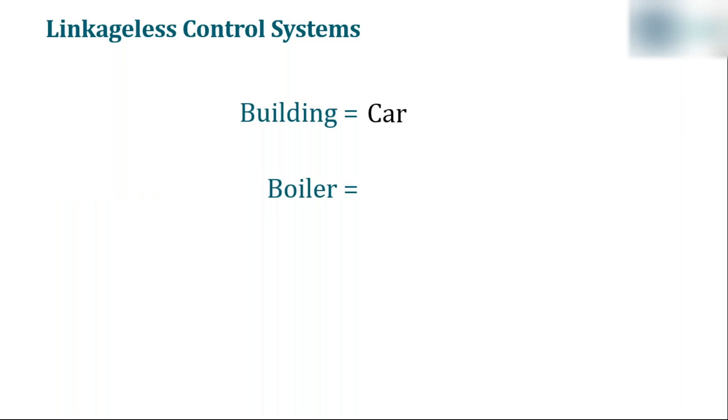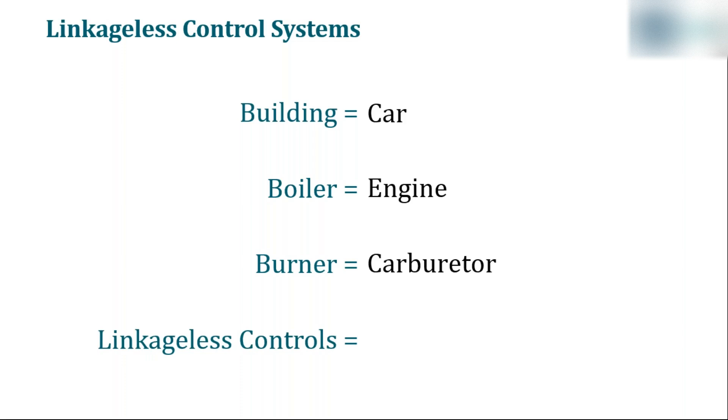But first, why linkageless? I like to use an automobile analogy to explain. In a boiler system, the building or the process is most like the car, the device that uses energy for a purpose. The boiler, which converts energy, is like the engine, while the burner is most like the carburetor, mixing air and fuel. The air-fuel ratio control system, when an old cam and linkage type, is like the float and jets inside a traditional carburetor. Almost no one likes to work on them, and fewer people truly understand how to make them work properly. The air-fuel ratio control system, when linkageless, is like an electronic fuel management system found on most cars since the mid-1980s.

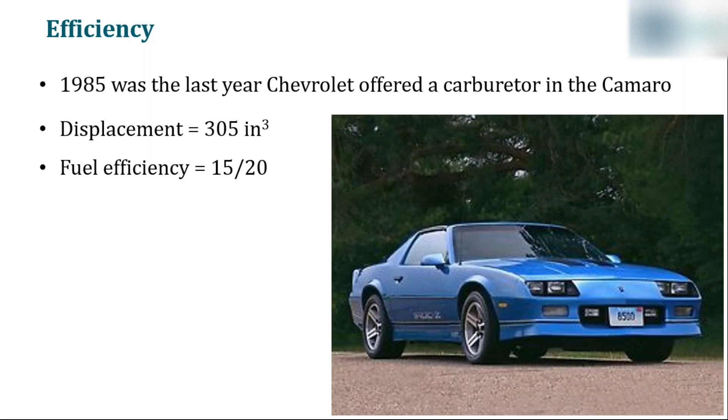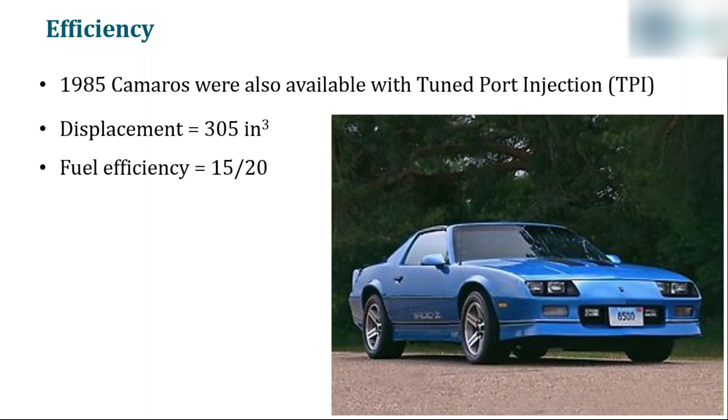Now, the Camaro is a good example because 1985 Camaros were also available with tuned port injection, one of GM's early versions of an electronic fuel management system. That same 305 cubic inch engine with that same fuel efficiency could produce a markedly better 215 horsepower. That's an 18% increase in power by simply improving the air-fuel ratio control. Remarkable. Sure, we look at it a little differently in burners, but the point remains: improved air-fuel ratio control results in more efficient conversion of fuel to energy, whether it's being done to smoke the rear tires in a Camaro, create steam in a boiler, or anneal steel in a high-temperature furnace.

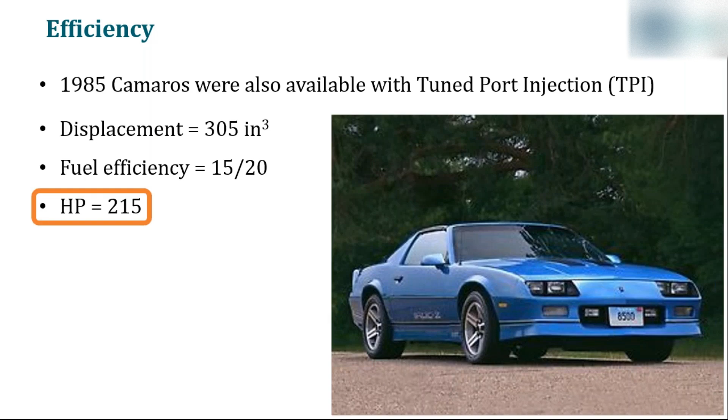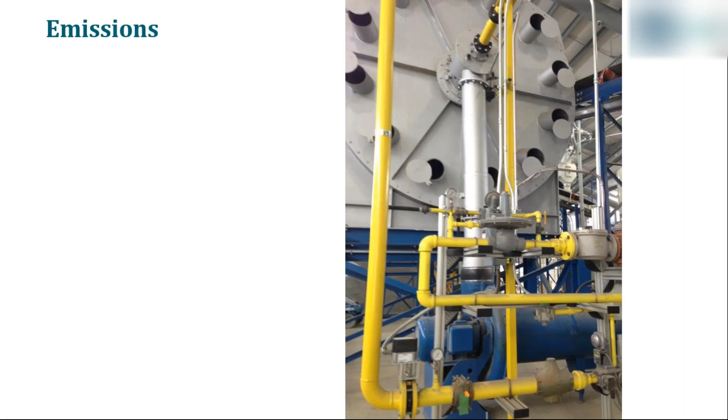In an attempt to fight climate change, New York City recently passed the Climate Mobilization Act, which requires significantly reduced carbon emissions from buildings beginning in 2024. Other large cities are expected to follow this lead. The only way to reduce CO2 emissions is to burn fewer hydrocarbons, and one of the easiest ways to do that is with precise air-fuel ratio control.

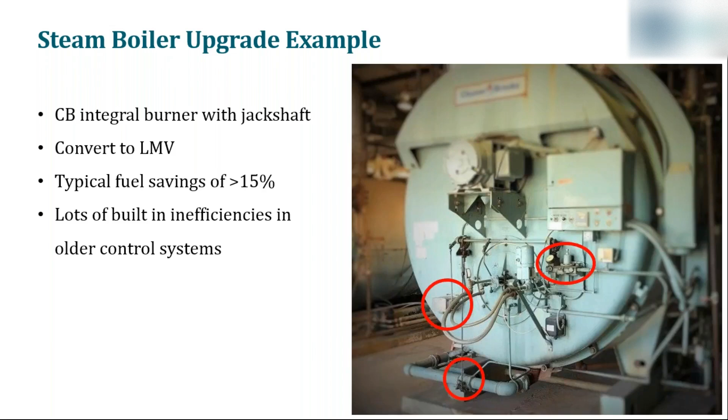Replacing this system with a linkageless control improves not only the hysteresis in the jackshaft system, but also several other built-in inefficiencies in this type of design.

Let's talk a bit about those built-in inefficiencies. In Europe, where fuel efficiency and emissions have been a focus for much longer than here in North America, even their linkage or cam and link arm burners have eliminated quite a bit of inefficiency. This is primarily due to the extra switches in their modulating actuator. A traditional European cam and link arm burner will have between 4 and 7 independent switch positions in their actuator, with the ability to prove ignition, low fire, high fire, home, post-purge, and pre-purge, and in many cases, ignition and low fire for 2 different fuels separately.

Compare that to traditional North American linkage burners with only one actuator with two switches, which can only prove low and high.

Additionally, intelligent PID control provides much better set point control for the process variable, and less burner cycling. Compare that to 135 ohm slide wire control, and you automatically have a roughly 10% inefficiency built into the older jack shaft designs.

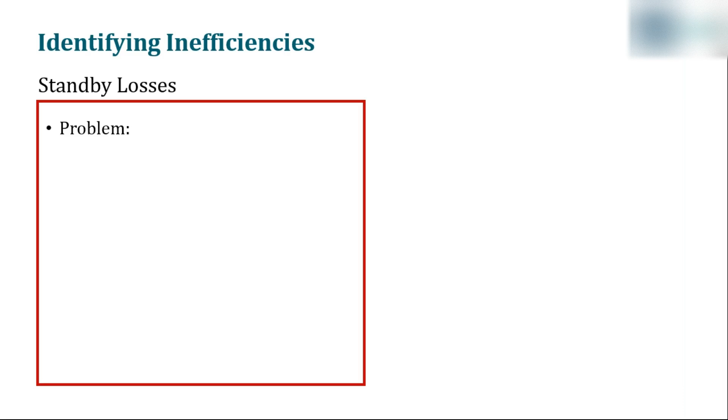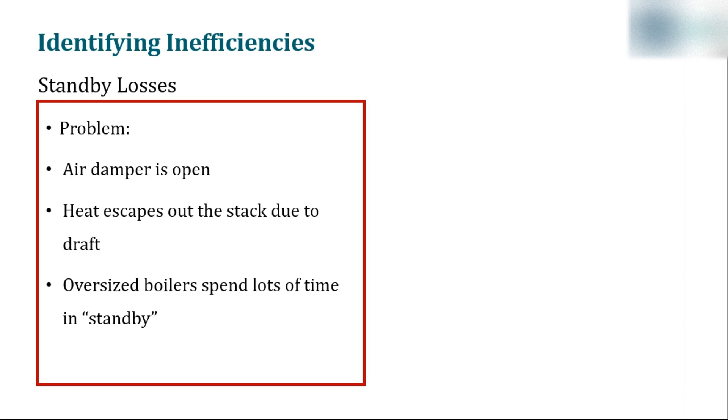How do these extra switches I talked about help? Well, they help in the same way that closing the flue in your fireplace during the winter helps. When you don't have a fire roaring, that open flue acts as an escape route for the warm air in your living room or in your boiler. The LMV system allows an independent home position at which your air damper can be fully closed, and it can reduce the heat losses through the stack while the boiler is in standby.

Similarly, every time a warm boiler purges, energy is wasted. The more a boiler cycles, the more it purges. Now, excessive cycling can happen for a number of reasons, but a couple of the most common are that the boiler is oversized, that the burner can't turn down far enough, and that the low fire setting is handicapped or artificially high due to a reliable ignition set point or a dual fuel like oil, keeping everything set up higher at low fire than it needs to be.

Additionally, cheap proportional-only temperature or pressure control can exacerbate cycling. The image here is showing the desire, if you will, of a set point to be held, and poor proportional control at trying to do so. Every time you are above or below that set point, you're wasting energy - quite a bit more at points A, C, and E on the curve when you go so far above and below the set point that you're beyond the burner on and off thresholds.

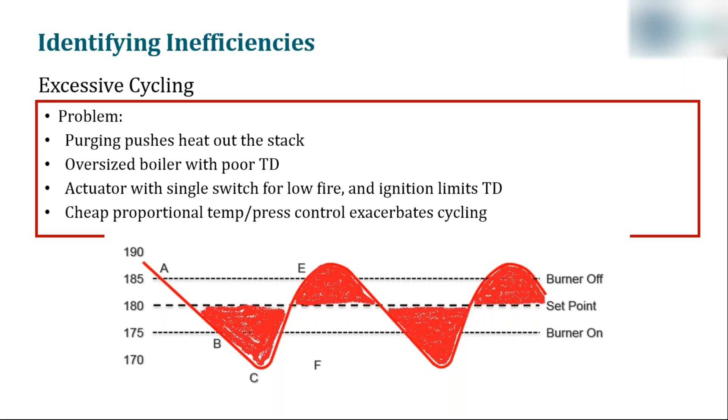So the solution to this problem? Install an LMV system which has separate positions for low fire, ignition, home, and other special positions, and has intelligent PID control with low fire hold capabilities and other features.

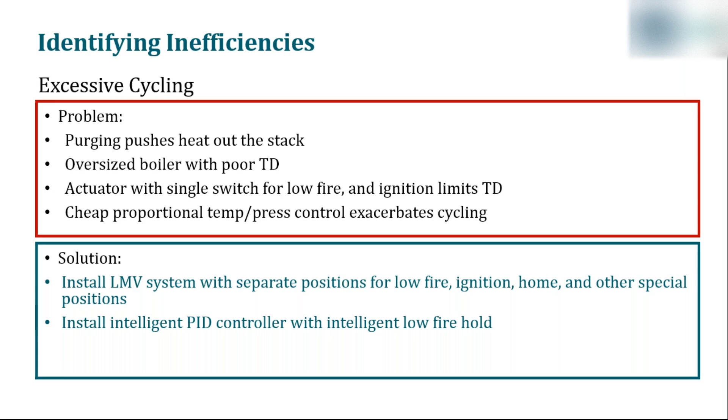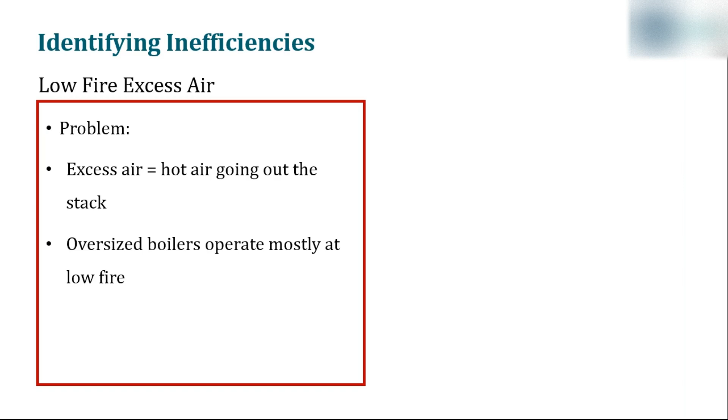Another common problem is too much excess air at low fire. In order to compensate for the hysteresis, or the lack of repeatability in a linkage system, low fire is typically set with more excess air than required for clean combustion. This turns your boiler into an inefficient air heater and simply sends energy out of the stack.

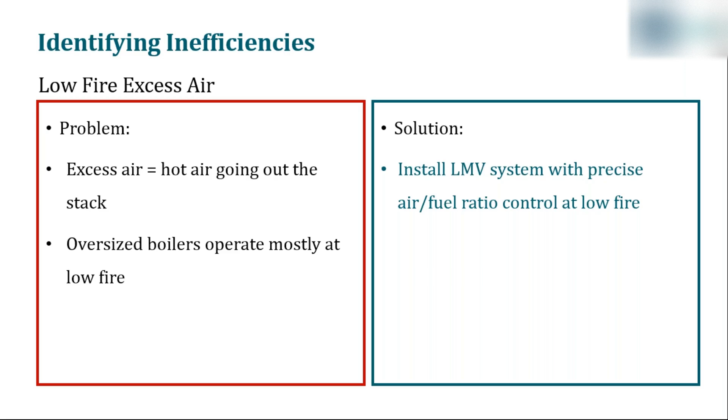Now, some boilers run at or near 100% all the time, and in those cases, there's no savings to be had by fixing low fire excess air. But many boilers run at or near low fire all the time, where there's tremendous potential for fuel savings.

And how about air-fuel ratio control throughout the entire curve, plus O2 trim? When you have a linkage burner, you have very limited air-fuel ratio control. In fact, you can really only accurately control the air-fuel ratio at two points, high fire and low fire. Everything in between, you're somewhat at the mercy of the linkage for. Even systems with cams in them and adjustability have pretty significant mechanical limitations and tremendous hysteresis.

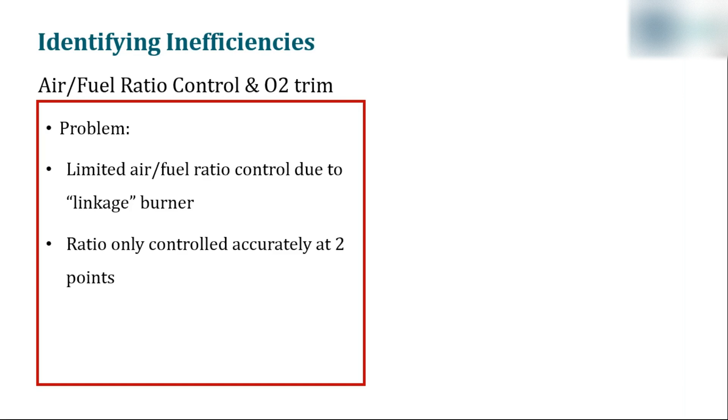So the solution to this? Install an LMV system which can control the full combustion curve, with 6 highly precise actuators and a VFD, from as few as 2 to as many as 15 points in the range of burner operation.

Additionally, you can install O2 trim for large, frequently used boilers. You can install it technically on any boiler, although the return on investment may be a little hard to justify. But O2 trim will add an O2 sensor in the stack and trim either the air damper or the VFD setting to maintain an oxygen set point in the stack and keep your air-fuel ratio just exactly where you want it to be, regardless of changes in ambient conditions.

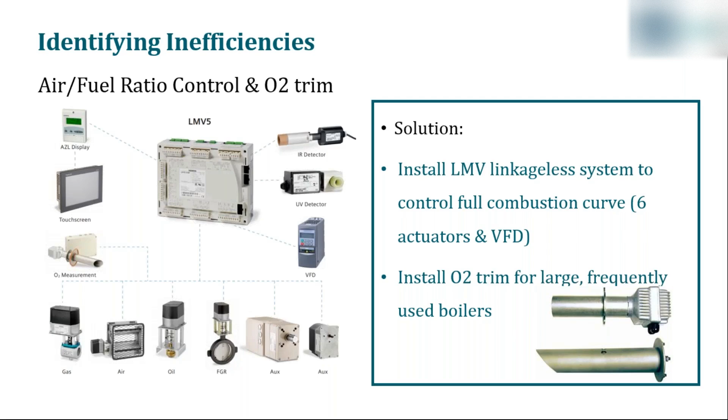So we have a bit of a savings potential checklist that we go through when evaluating a project. I won't read through all of this, but a few things to be aware of as you read through this list.

High pressure steam can often handle 10-to-1 turn down. Low pressure steam may not. So you need to be careful to pay attention to that and not condense in the stack.

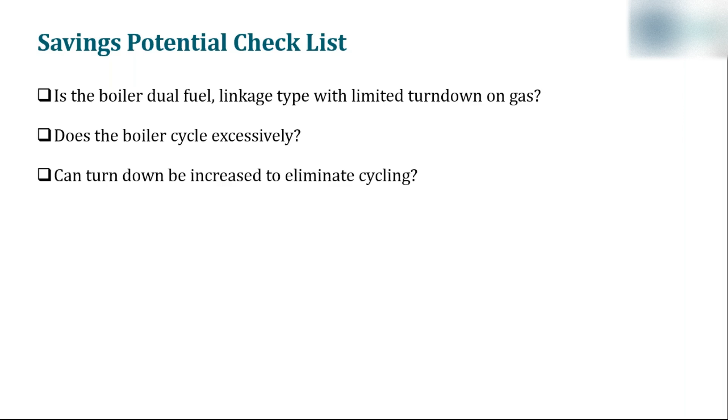Some industrial process applications have excess air in the process, so reducing it through the burner can provide benefits in emissions, but it may not provide any benefits in system efficiency. And linkageless primarily makes gains by optimizing excess air and effectively using the special positions discussed previously.

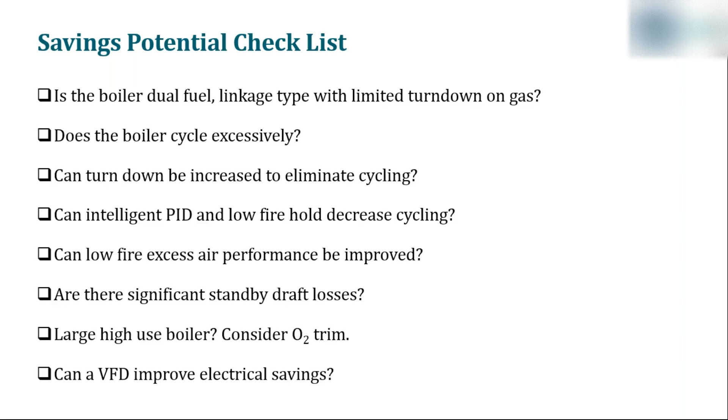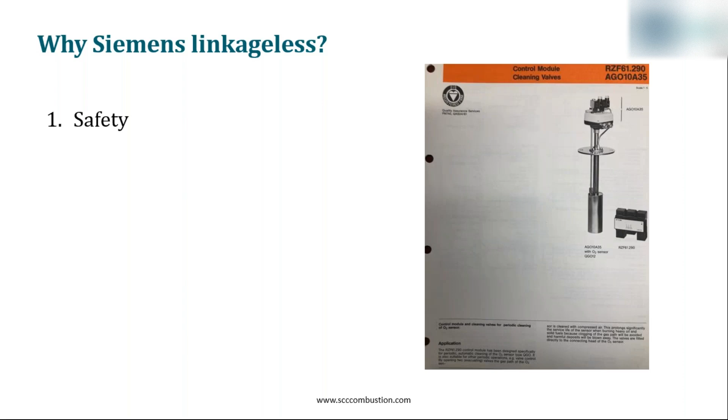So if I've done my job properly to this point, I've convinced you that linkageless control is worth using. But you may ask, why Siemens? After all, other manufacturers offer linkageless systems too. Well, Siemens was the pioneer in linkageless controls. Around the same time GM was putting electronic fuel control on the Camaro, Siemens was already putting it on burners. We've learned a lot about these controls since the mid-1980s and have continued to improve upon those early systems, while keeping the tenets of Siemens' mission clearly in focus. As a result, the LMV is the most widely used linkageless control system in the world. So let's learn more about it.

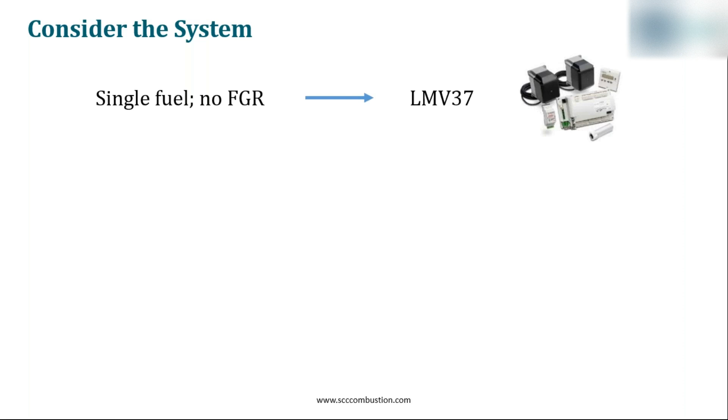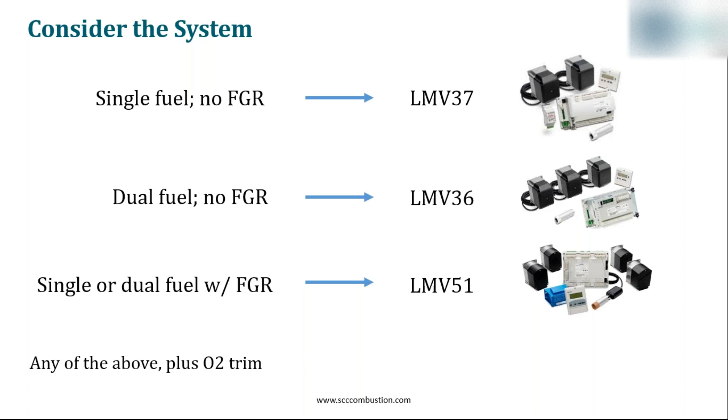LMVs are available in different types to meet a variety of application requirements. For a simple single fuel application with no FGR, the LMV37 can be a great fit. For dual fuel, still with no FGR, try the LMV36. For single or dual fuel with FGR, the LMV51 is often the right choice. And for any of the above, plus O2 trim, the LMV52 will check every box.

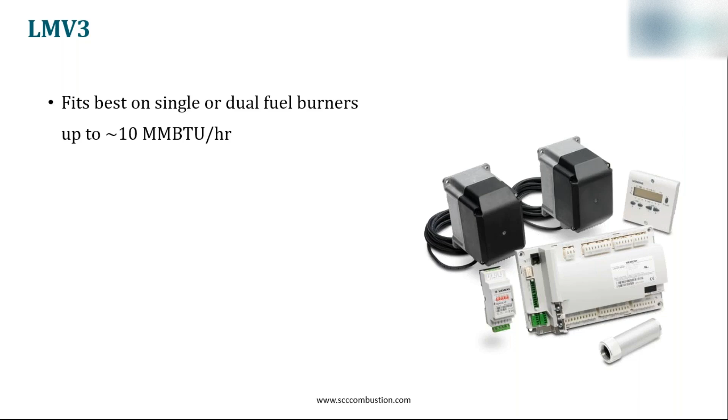Introduced in the mid-2000s and significantly improved in 2016, the LMV3 really fits best on single or dual fuel burners up to approximately 10 million BTUs per hour. The only real limitation on the LMV3 in terms of capacity is the torque of the actuators. We'll talk more about that in a future slide.

Think of it like a configurable flame safeguard plus parallel positioning control. Due to its simple operation and relatively low cost, it's a great way to improve performance of nearly any nozzle mix process burner or boiler burner, especially those trying to achieve low NOx.

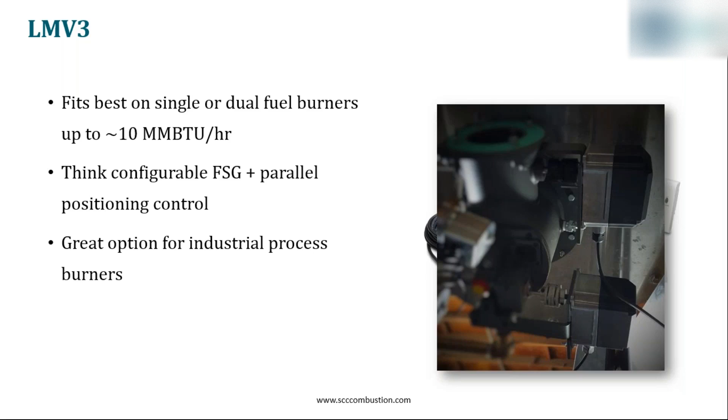And if any of you have, or if you have customers with recently obsoleted Honeywell ControLinks systems, this is a great retrofit alternative. You can find more information on this specific opportunity by visiting this link or by going to the scccombustion.com website and clicking on Systems.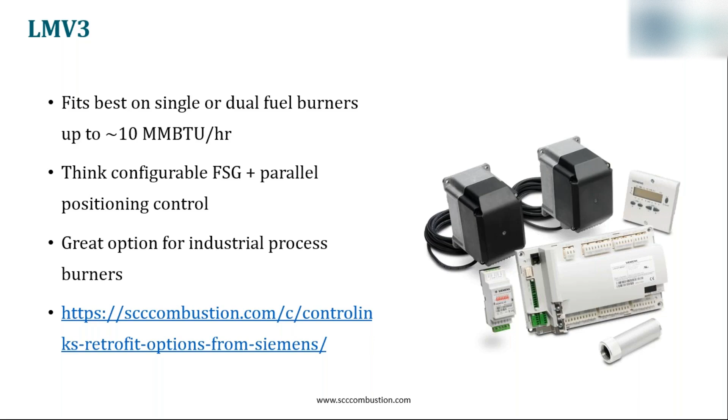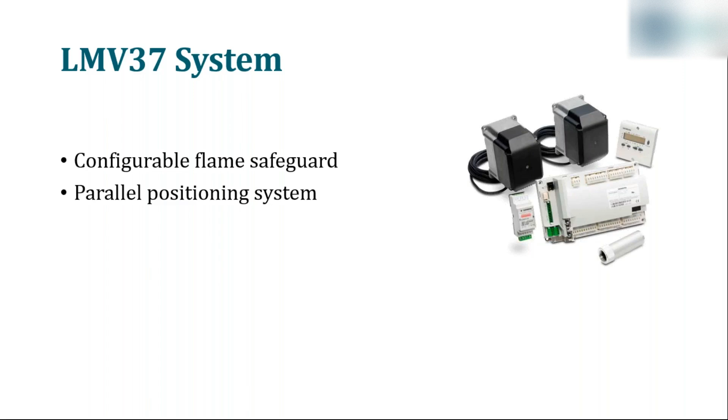The LMV3 is easy to install, highly accurate, and globally approved, so it can be used anywhere in the world. It includes a configurable flame safeguard, a parallel positioning system, and an integrated valve proving system. It can manage up to 2 actuators plus the VFD, and it does require an external temperature or pressure controller.

This is typically done with a 4 to 20 milliamp control signal from a PID loop controller sent to the LMV, although there are a few different options available.

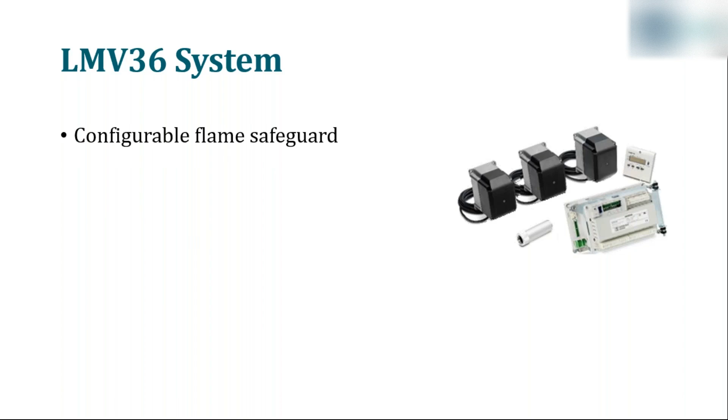The LMV36 system is very much like the 37, but it includes 2 totally separate fuel curves for dual fuel applications. It can run up to 3 actuators in total, 2 at a time, plus the VFD. These dual fuel curves can also be used for summer-winter settings in certain single fuel applications.

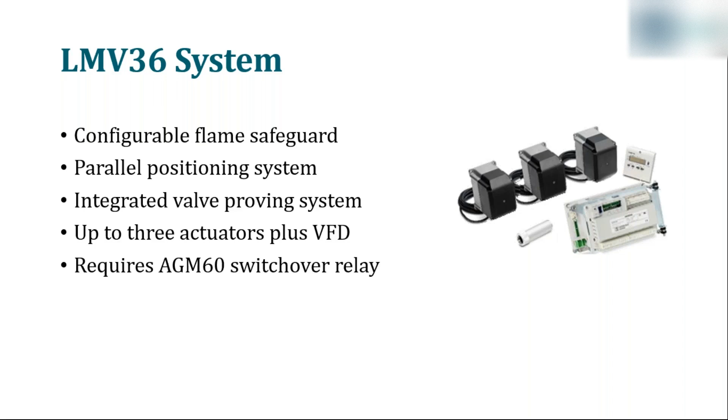This does require an AGM60 switchover relay, which we'll talk about in the upcoming slide. And like the 37, the LMV36 requires external temperature and pressure control and external temperature and pressure controller.

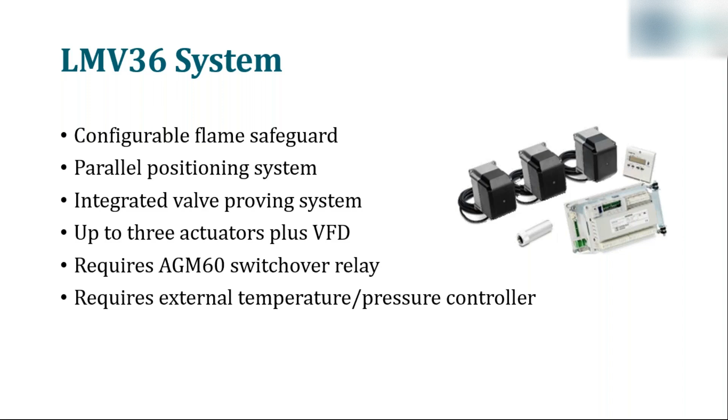The AGM fuel switchover relay, we kind of jokingly call it a super relay. It allows 2 sets of POCs, 2 sets of gas pressure switches or oil pressure switches in the fuel train, and 2 fuel actuators to come into the relay and be monitored by the LMV, one or the other. So you can run fuel 1 or fuel 2, but you cannot run them at the same time. We also offer it with a stacking bracket, as shown here, for applications where there are space constraints.

The integrated flame safeguard in the LMV3 has adjustable safety times. Things like purge, trial for ignition, pilot flame establishment period, flame failure response time, and many more items are adjustable within parameters. It can accept a UV scanner or a flame rod and can annunciate over 100 unique faults.

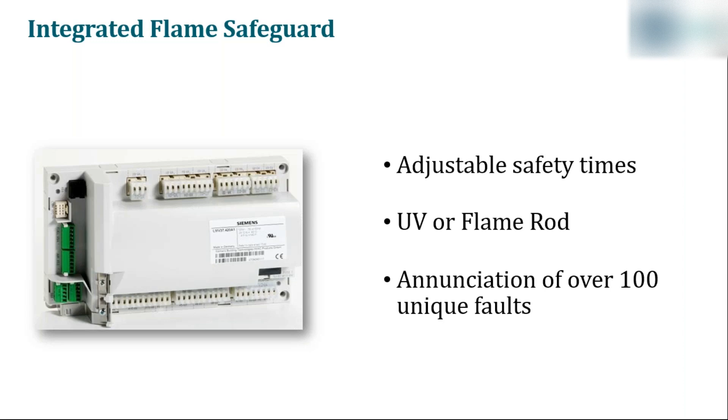The parallel positioning part of an LMV3 has 9 fuel curve points, plus an additional 3 independent positions for purge, ignition, and home. These independent positions are completely unique from the fuel curve and allow you to make the fuel actuator, air actuator, and VFD settings anything you like for these points.

So you can make an ignition point that lights reliably every time, perhaps a little more rich, perhaps at an elevated firing rate, and it doesn't have a negative impact on your ability to turn the burner down. An LMV truly allows you to get maximum performance out of your burner.

The actuators on an LMV are accurate to 0.2 of a degree, on an LMV3 that is. An LMV3 will try to control the actuators to 1/10 of a degree and often will do so, but due to the position feedback in the actuators, the tolerance band, if you will, is 0.2 of a degree.

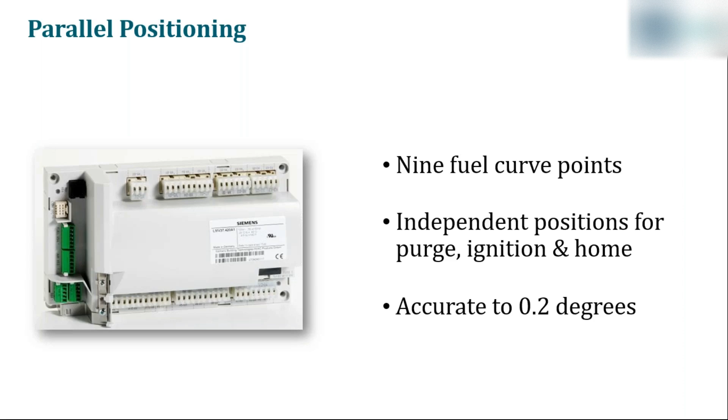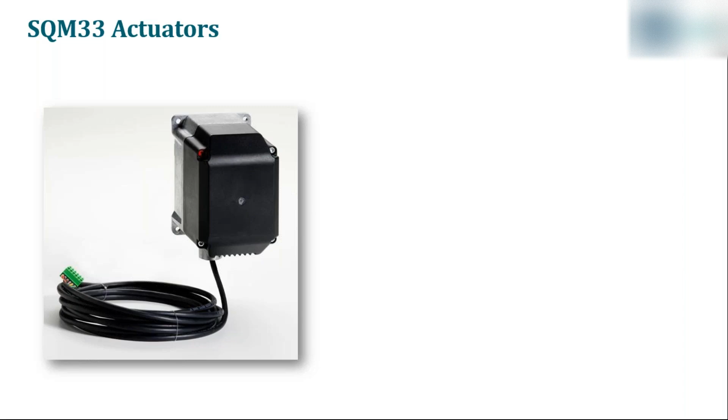The SQM33 actuators are designed specifically for use with the LMV3. They're available in 2 torques, and you'll recall I said earlier the LMV3 is good up to about 10 million BTUs per hour, and that's simply limited by the torque required to drive an air damper. If you have an air damper design that requires less than 90 inch-pounds, you can use this control on much larger burners if you like.

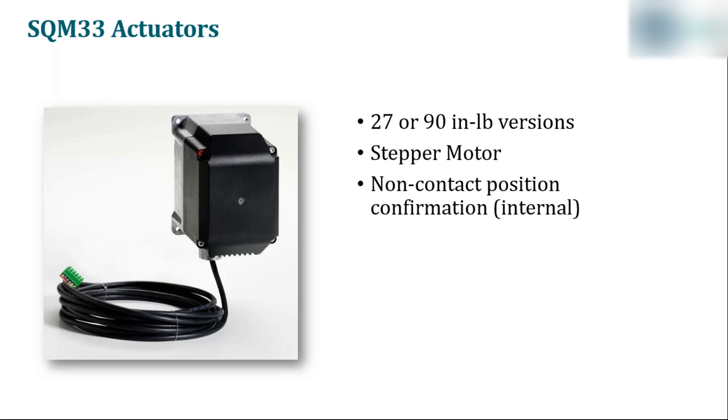These actuators have an internal stepper motor for very precise positioning and non-contact position confirmation. So the LMV3 always knows where the actuators are while it's operating. This is a safety relevant function to ensure that your burner ratio is where it's supposed to be. There are NEMA 4 versions available for applications that require it.

On the LMV3, the actuators do require greater than 90 degree travel on startup for referencing. What that means is the actuator needs to be able to go past 90 on the high side or below 0 on the low side during each startup to find its home position for the position feedback to work properly.

And it's supplied complete pre-cabled with a 12-foot long cable as shown here.

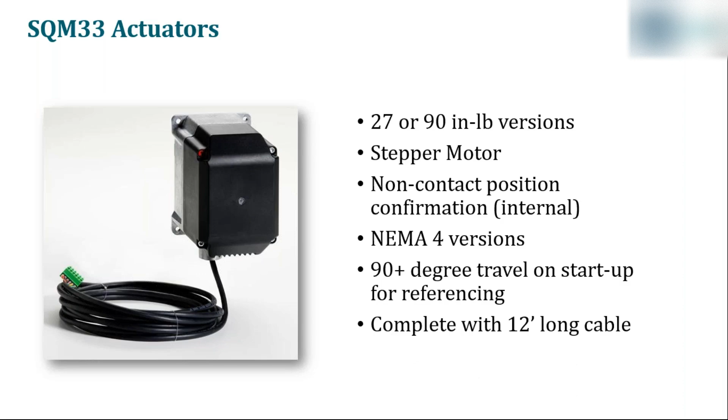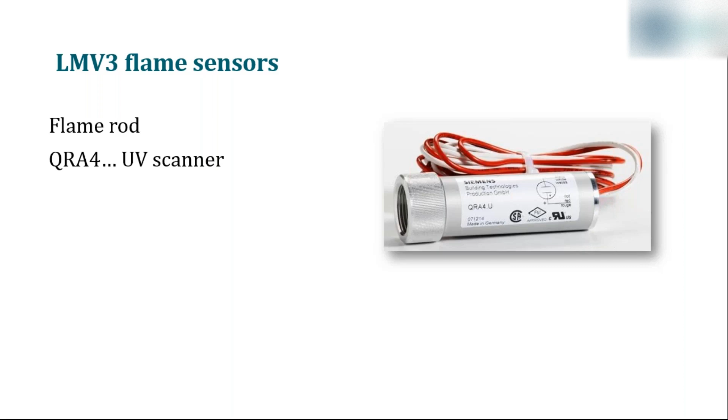Flame sensors for the LMV3 include a flame rod and the QRA4 UV scanner. This is a standard non-self-check UV scanner from Siemens. The UL approval also includes this third-party self-check UV scanner shown here. It's a good option for applications where the LMV3 is a good fit otherwise and continuous operation is required.

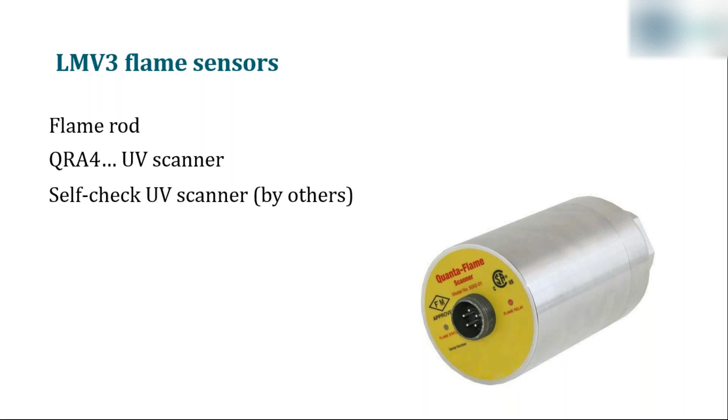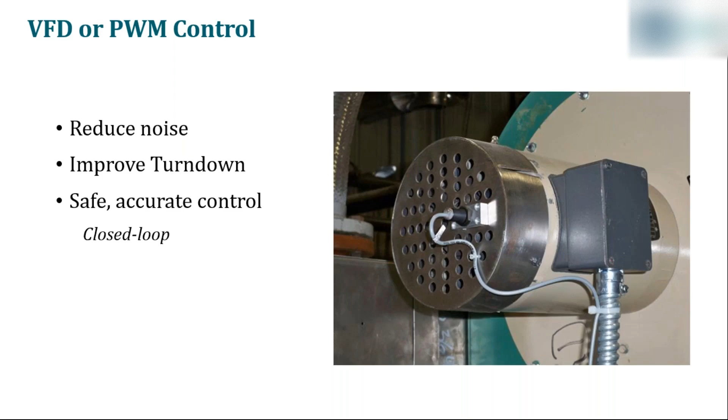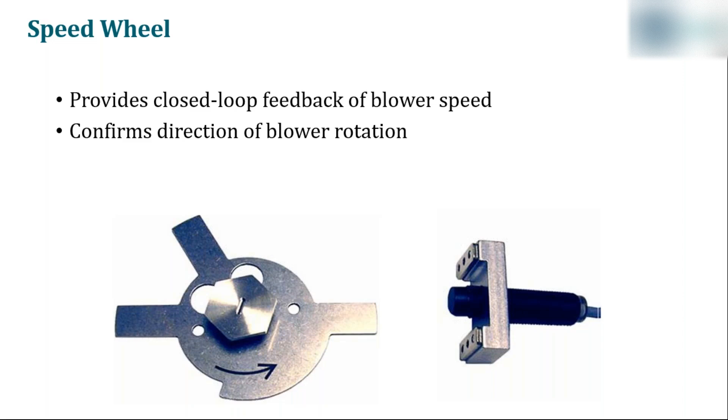This speed sensor and speed wheel is easily added to TEFC motors. We've also added it to other motor types and can certainly help you with that. So if you have applications where you need this and questions about it, please don't hesitate to contact SCC.

The LMV3 is available with a Modbus module. It's a separate device you can buy so that you have Modbus when you want it. It's RS485 and has a little bit more than 50 addresses available. Most of them are read-only, with one notable exception being firing rate command. You can send that over Modbus if you like.

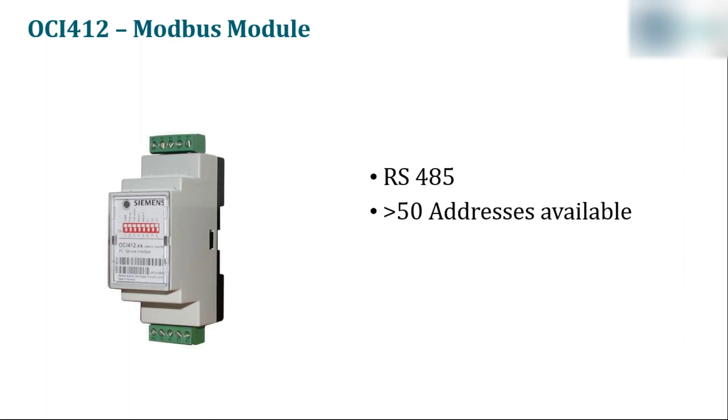There's a PC software available for use with the LMV3. It's called the ACS 410. It requires this dongle cable, and much like the AZL, there are different levels of access in the software determined by which dongle cable you have, the user, the service, or the OEM level.

It allows you to trend, log, print, and create startup reports. You can view burner status in real time. You can view a text history of burner faults, and you can store a library of parameter sets.

So there's no need to program each unit from scratch. This can be incredibly valuable in an OEM production environment when you're building burners or boilers or other systems that will use similar parameters time and time again. It can also be quite valuable as a service tool if you have a boiler room with multiple boilers of the same type. You can commission one and dump all those settings into the others, and rather than starting from scratch, just go into the second, third, and fourth boiler and touch up some curve points as needed.

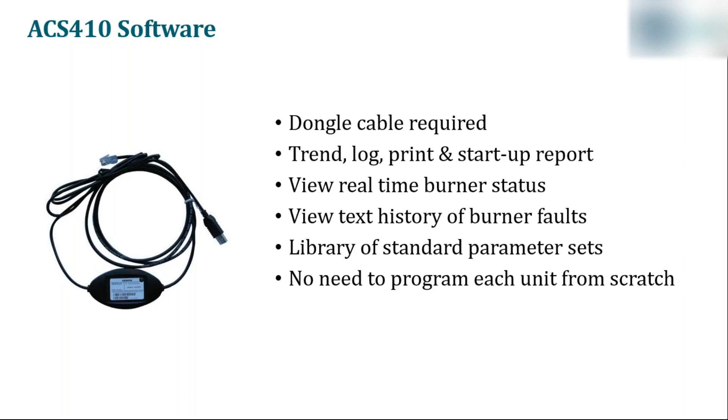Finally, the AZL23 of the LMV leaves a little bit to be desired in terms of information and a user interface. So SCC touchscreens provide additional benefits such as draft control capability, the ability to connect to a master lead lag panel, the ability to connect to a building management system, and more.

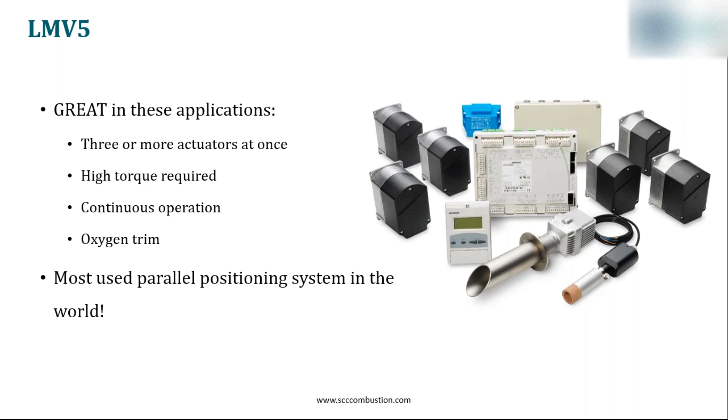Initially introduced in 1991, the LMV5 has been through 2 complete engineering overhauls and dozens of minor improvements since. The LMV5 is the linkageless control system that other manufacturers continually attempt to compete with. You can use it on all types of applications, anywhere in the world, with the confidence that comes from working with the innovation leader.

Like the LMV3, it's easy to install, highly accurate, and globally approved. It includes a configurable flame safeguard, a parallel positioning system, and an integrated valve proving system. The LMV5 can control up to 6 actuators at one time and is available with an internal temperature or pressure PID controller.

There are also versions available with O2 trim as an option. The integrated flame safeguard has adjustable safety times for things like purge, trial for ignition, pilot flame establishment period, flame failure response time, and many more.

It can handle an infrared scanner, a self-check UV scanner, or a flame rod. And it provides clear text annunciation of over 100 unique faults.

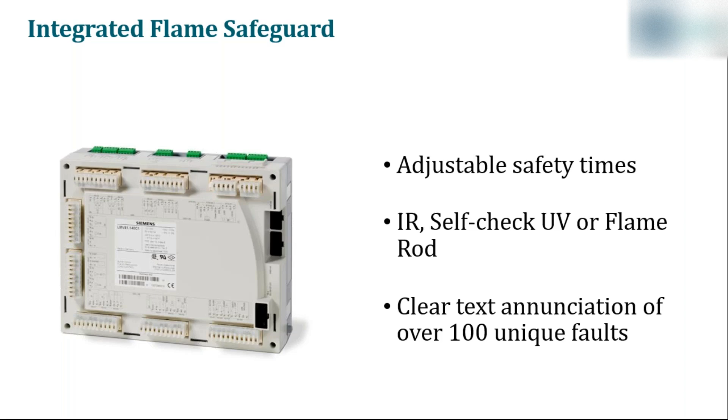Air-fuel ratio curves in the LMV5 are a cinch. Enter as few as 2 points or as many as 15. If you get started and figure out that you need to add or change points, you can do so easily and in real time.

If your burner has a touchy spot in the operating range, perhaps it's too noisy or a bit unstable, you can apply a feature called the load mask to move right through that section during normal operation and all but eliminate it from being a concern.

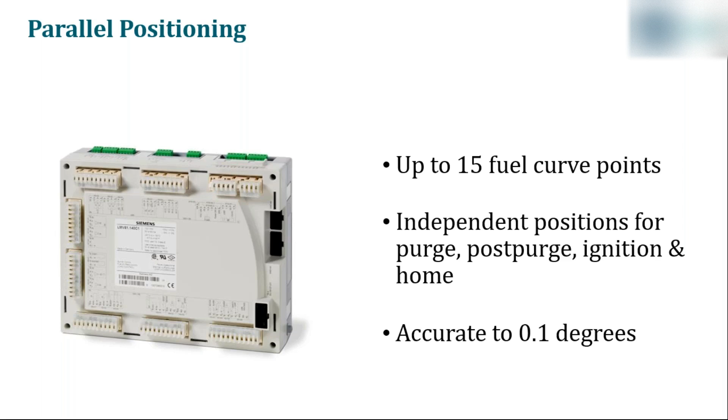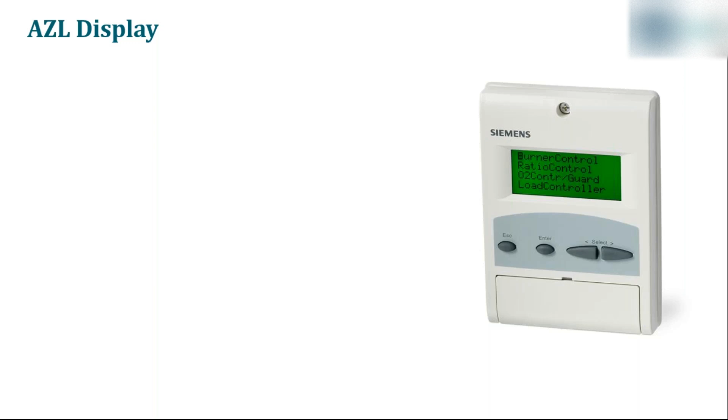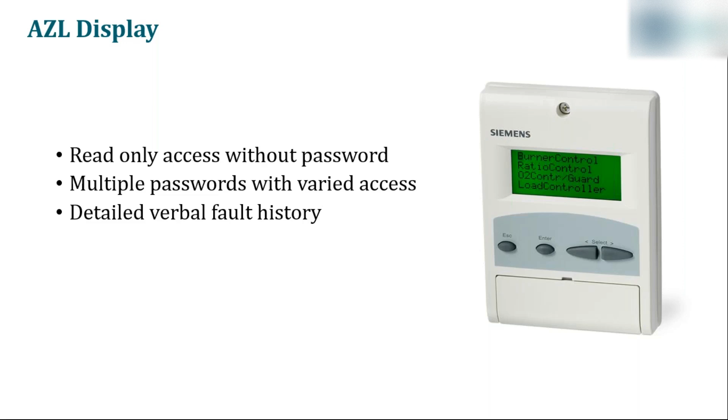The AZL52 display, shown here, provides 4 lines of clear text for programming and seeing what's going on with the LMV5. It is also read-only without a password, and multiple passwords allow various levels of access. It includes a detailed verbal fault history and can display flame signal strength, firing rate, and actuator positions.

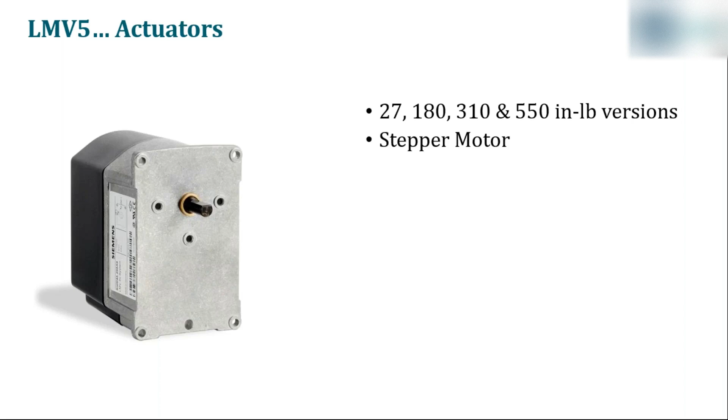Speaking of actuators, LMV5 actuators come in a few different flavors. All of them are accurate to 1/10 of a degree. They come in 4 different torque ranges. They have an internal stepper motor, and NEMA 4 versions are available.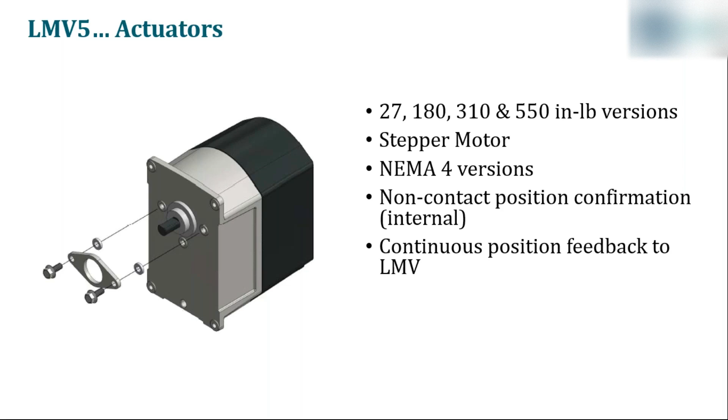The non-contact Hall effect sensor for position confirmation, which continuously provides position feedback to the LMV5, is extremely robust and suitable for high vibration environments. And these actuators are wired on the CAN bus, which has a maximum cable length of 300 feet.

Flame sensors for the LMV5 include a flame rod, an IR scanner, which is inherently fail-safe, and the QRA75 self-check UV scanner. The LMV5 is approved for continuous operation with any of these available flame sensors.

Modbus is native through the AZL52 on the COM2 port shown here in this drawing. Over 250 addresses are available.

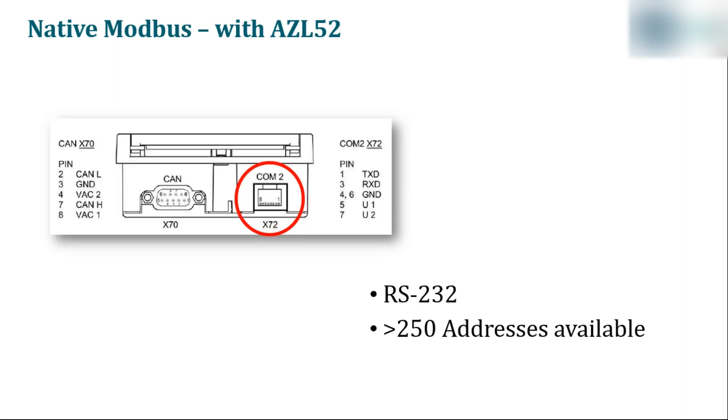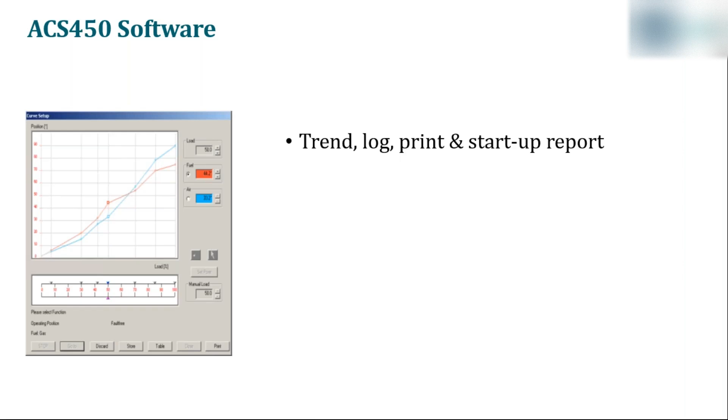And there's a PC software available to communicate with the LMV5. It's different than that of the LMV3. It's called the ACS 450, and it provides a lot of the same benefits we talked about before. Perhaps the most valuable are that you can keep a library of standard parameter sets and simply dump them into a new LMV5 without having to completely program each unit from scratch.

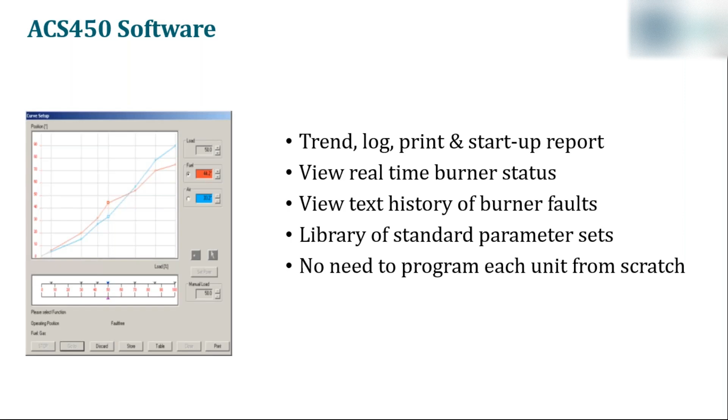And you'll see here an LMV5 control panel enclosure. SCC offers these types of enclosures with enhanced touchscreens that offer additional benefits like draft control, connection to a master lead lag panel or building management system, expanded annunciation for other limits on your boiler or on your process, and monitoring of other boiler room instrumentation and more.

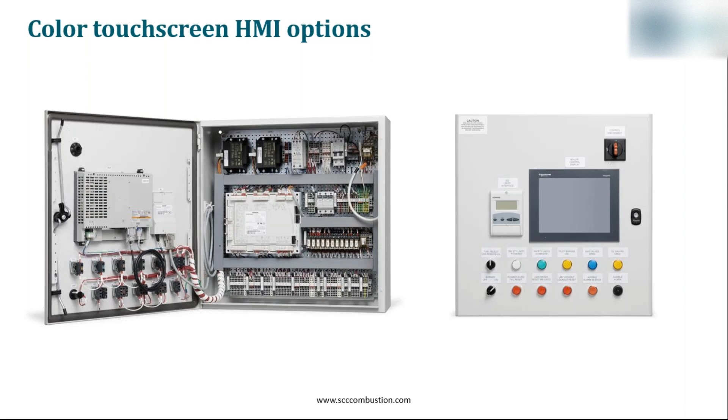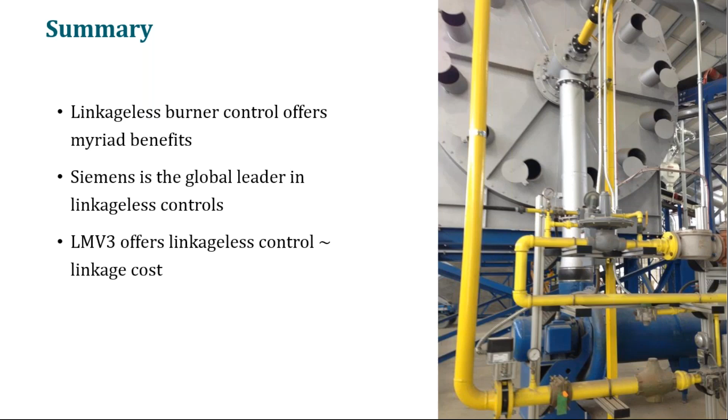So in summary, linkageless burner controls offer myriad benefits. Siemens is the global leader in this space. The LMV3 offers linkageless control benefits at near a linkage cost, and the LMV5 offers significant capabilities for varied applications.